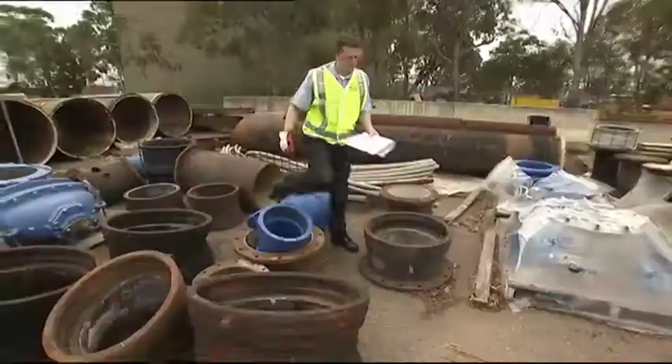I'm Chris Moore, I'm 32 and I'm a civil engineer with Sydney Water. I plan water supply systems. I look at water mains, pipelines, pumping stations, reservoirs, and I plan and design all of this infrastructure.

I'm involved in strategic planning, all of our assets, how they operate, how they're maintained, how system failures like power outages or burst water mains impact the risk of the system. And we try and pinpoint in the system where we need to fix problems first, prioritise them, then we roll out a program of capital works to fix the problems.

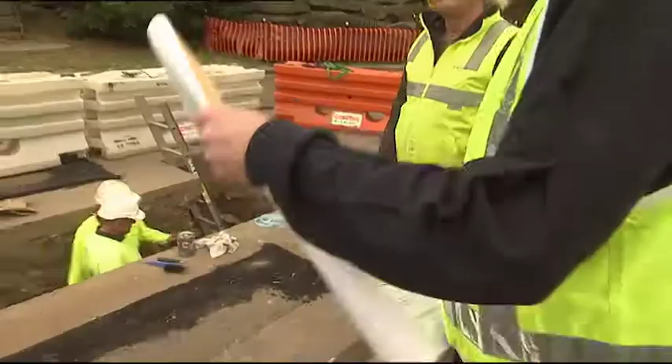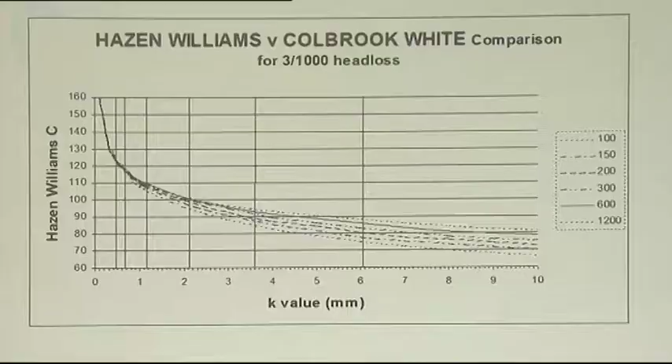I'm also involved in planning recycled water systems. I'm involved in going to conferences, which are interstate or overseas, and also preparing conference papers on best practices in water supply, planning and design. So it's good fun. The recycled water systems have only been new to Australia in the last 10 years or so,

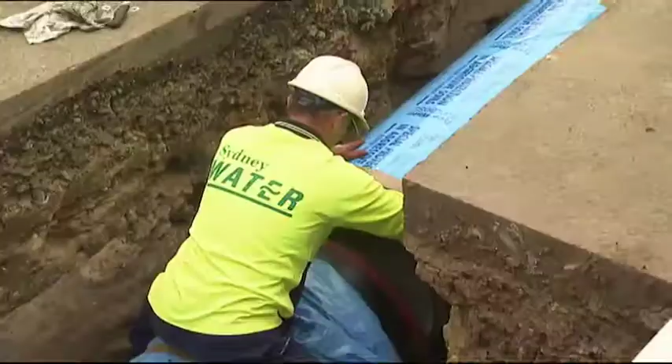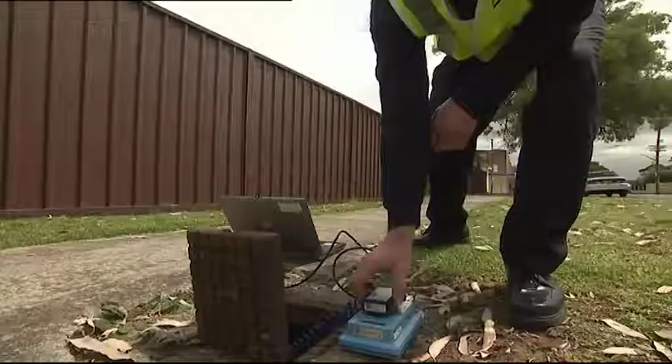and things like the peaking factors used for maximum day demand and maximum hour demand for reservoirs, pipelines, pumping stations, we have to get those numbers correct. Otherwise, if we go and spend hundreds of millions of dollars on capital works, it'll all be designed wrong. So some of my roles at the moment are actually going out and flow metering areas in recycled water systems and using that data to filter back into design criteria which are used by other planners.

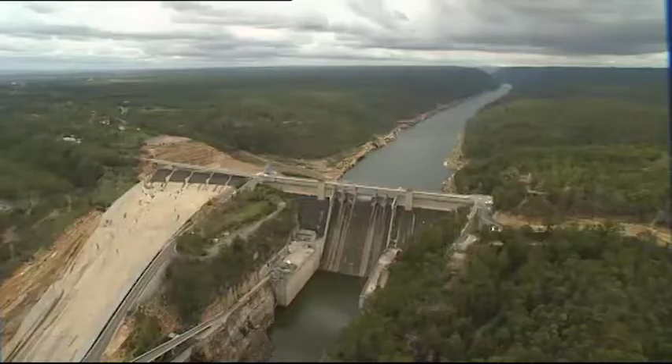I had an interest in things like geography, Landline. I watched that program for a number of years, and my family came from the country, so they always talked about drought and rivers and dams and that sort of thing. And I took up a civil engineering degree at the University of Western Sydney, and I won a position in the Sydney Water graduate program. And I've been able to rotate through a number of positions which the program offers.

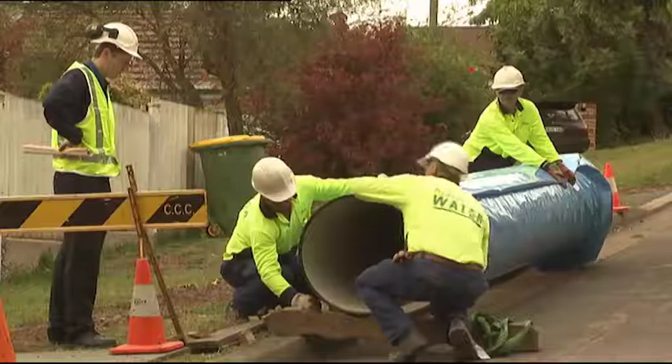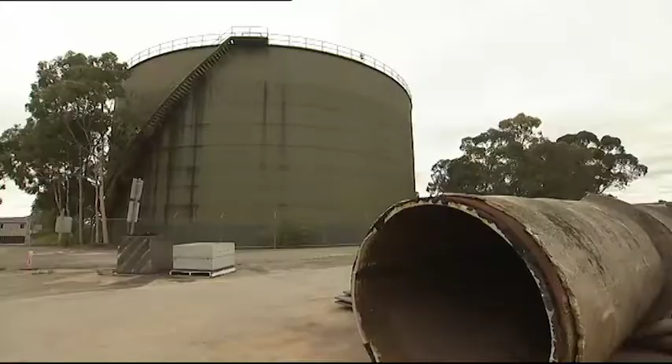And I was able to get hands-on experience, which was really great, and it lays a foundation for understanding how a water supply system works. And where I am now, I use all of that experience. The social and community benefits of water supply planning and design are actually quite critical, because without water, we wouldn't have a city and we wouldn't have an economy.

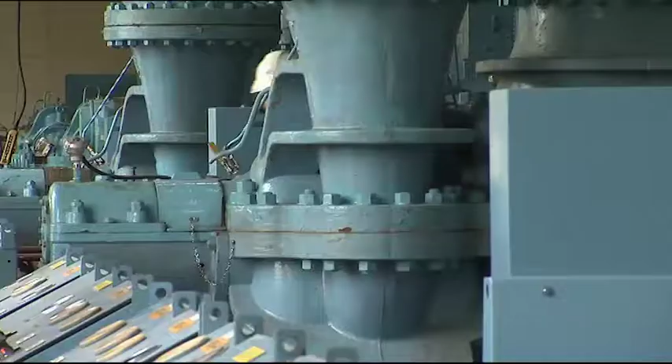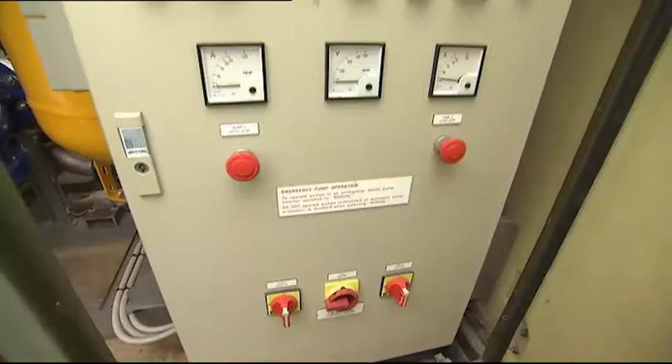Advice to a young person would be, it's important to get educated in engineering, understanding hydraulics, but I really think it's important to actually go out into the field and get hands-on experience. Sydney Water actually offers industrial experience for people still going through university or TAFE. I think there's cadetships, traineeships, apprenticeships as well. So Sydney Water covers quite a broad scope and offers a great variety to get your feet wet.

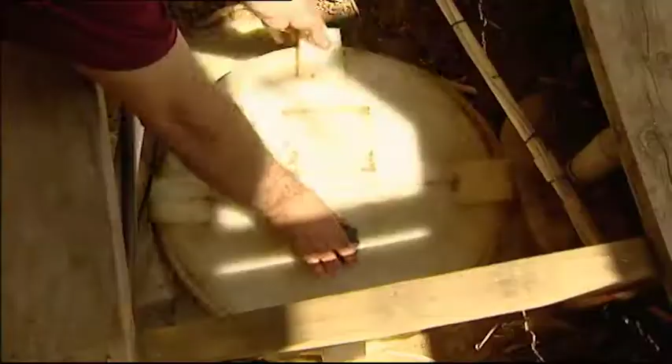The demand for civil engineers at the moment is actually very high and will increase across our whole country. We're going through drought, dam levels are low, and rainwater tanks, recycled water systems and desalination plants across most of our cities are now being constructed. And we need engineers because they've got the fundamentals of understanding mathematics and physics and how to plan and design water supply systems.

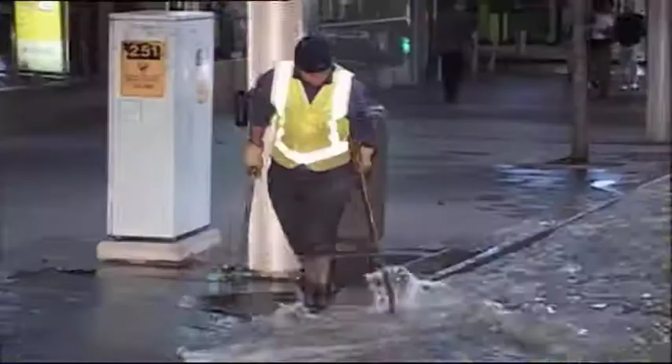During a large burst water main, usually we have maintenance crews that attend to the break. They turn the water off and they'll bring other crews over and they'll bring spare pipes and install the spare pipes. And we try to do that as quickly as possible.

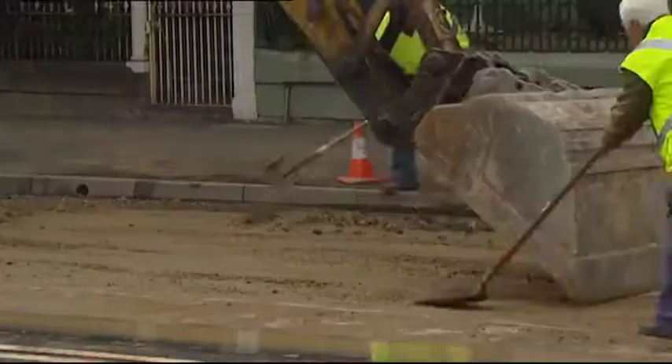But on the other, you have operations people who are actually watching the network of reservoirs, which ones are depleting rapidly, and they actually implement contingency plans to shift water around the system. And they use a telemetry system and hydraulic models to work out how to make that work so the system doesn't fall over.

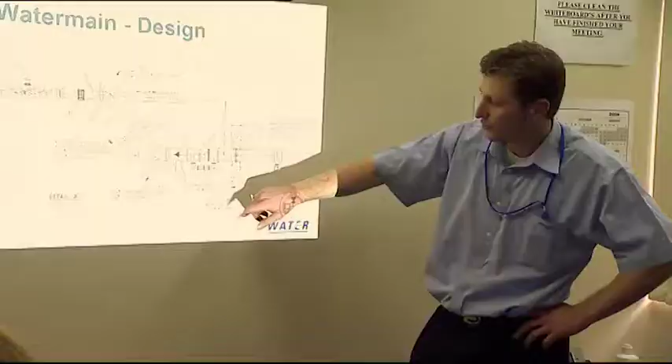Looking at things that I individually have planned are now sort of coming to fruition in the field, and you can go out on site and see, well, I planned and designed that reservoir or pipeline or infrastructure. So it's quite a buzz. I find that my interests in geography, water and the drought is exactly what I'm doing in my job, and I'm at the forefront of that. And the team that I work with, we're leading the way. And it's great.